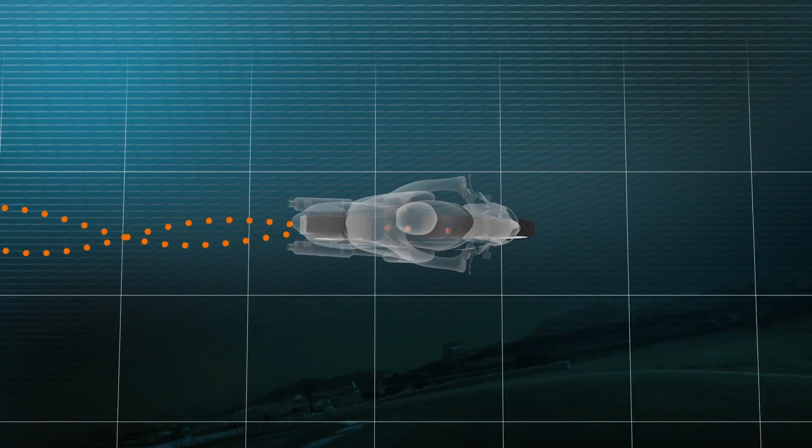Weaving at speed can affect handling as the motorbike oscillates and the wheels fail to track straight along the ideal targeted line. The phenomenon is essentially due to the rear tyre and perturbs the rider, resulting in a sensation of feeling unsafe. This loss of stability can effectively be dangerous.

To overcome the phenomenon, the intuitive step might seem to make the tyre more rigid. In reality, the solution is more complex than that. The answer actually depends on the type of motorbike, and it is important to distinguish the tyre's sidewalls and crown.

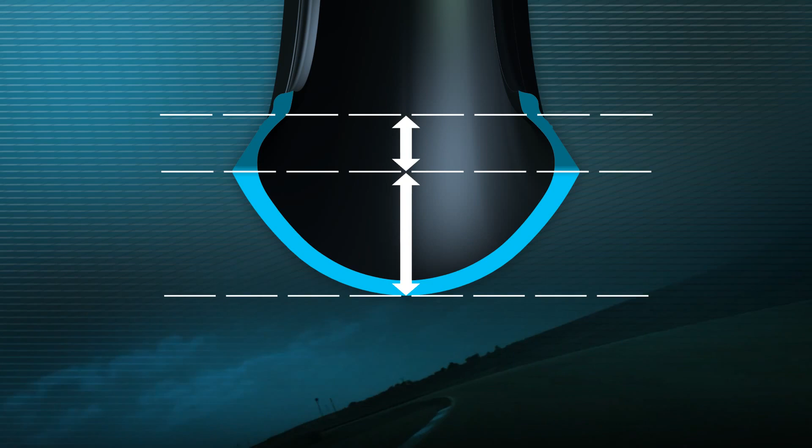In the case of a lightweight sports bike, straight line stability can be improved by reducing the rigidity of the crown. Yet the sidewalls must be rigid in order to optimize stability at high angles of lean.

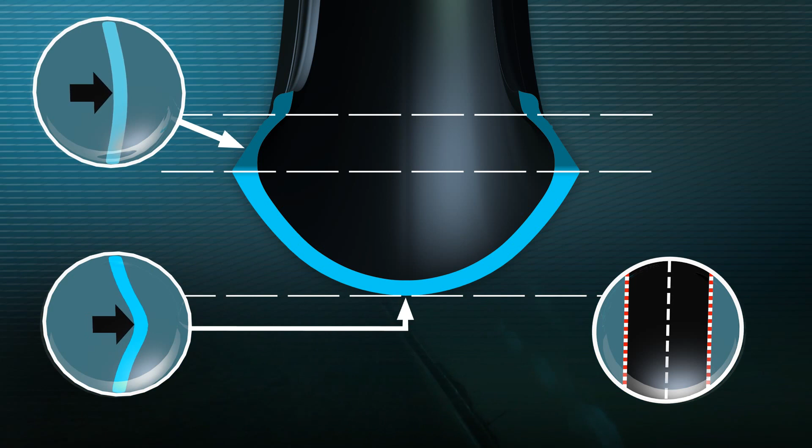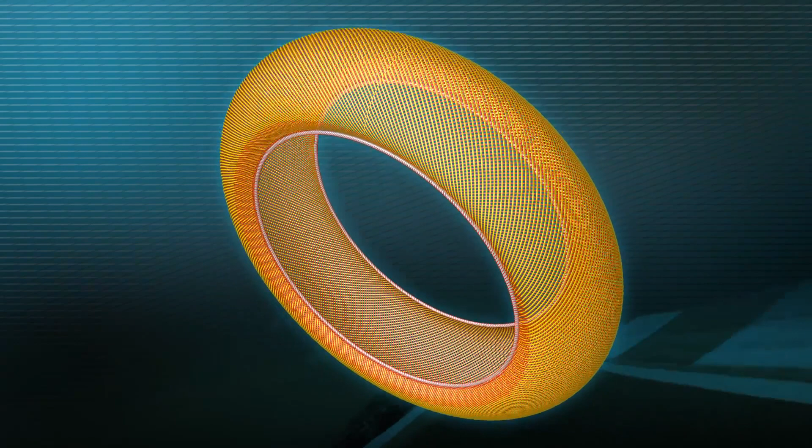So how can the rigidity of these two zones be made different? The casing of a motorbike tyre comprises two cord plies laid on top of each other. The degree of stiffness varies as a function of the angle at which these plies are overlaid. The bigger the angle, the more rigid the casing.

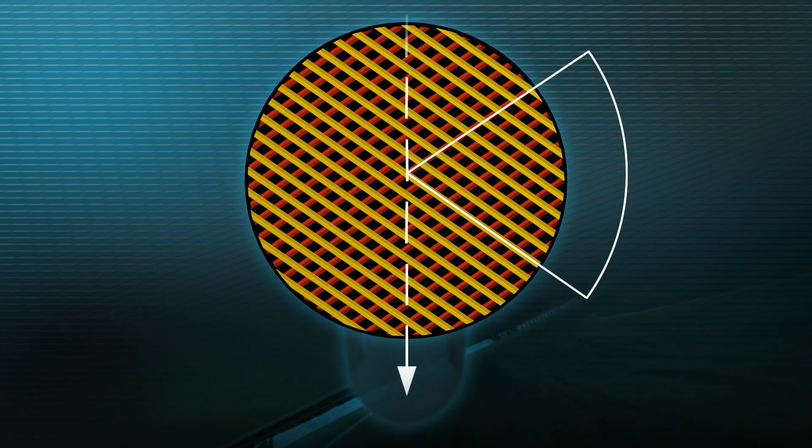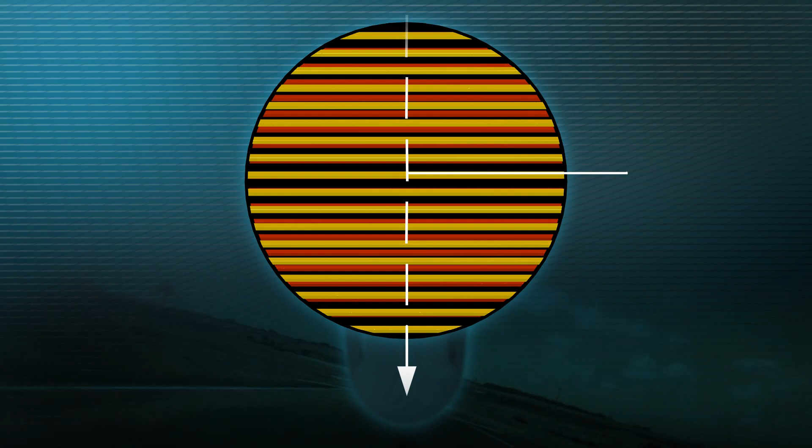To take an extreme example, the casing would not be very rigid if the two plies were laid parallel to each other. In the case of a conventional radial motorcycle tyre, the plies are crossed in relation to each other, although the angles at which they are laid can be identical. For example, -80 degrees and +80 degrees.

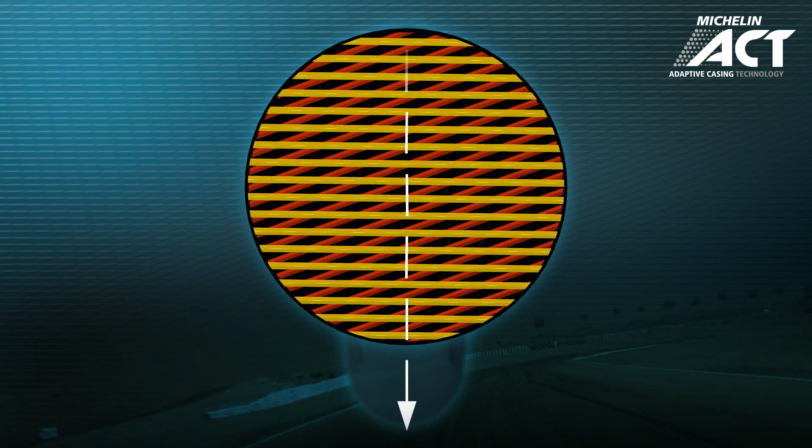With Michelin ACT, adaptive casing technology, the plies are laid at different angles, but to the same side. One at -70 degrees and the other at -90 degrees. Because of the small difference between these two angles, the crown is not very rigid.

At the same time, the first ply wraps around the beads and folds up over the sidewall to enclose the second ply. As a result, the sidewall's construction features three cord plies, which form a triangulated structure that is resistant to deformation. Taking the tyre as a whole, the low rigidity crown serves to provide straight line stability at high speeds, while the more rigid sidewalls favour cornering stability.

Thanks to Michelin ACT, each Michelin brings more performances together in all its tyres.